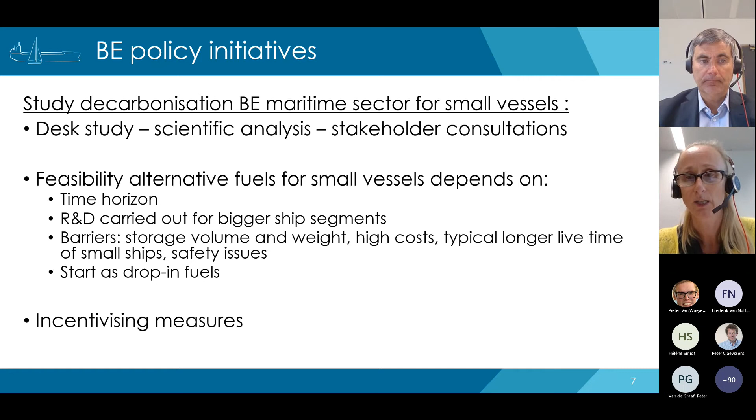On the other hand, these small ships usually have a lifetime typically longer than the bigger ships, and therefore the introduction of new technologies in the shipbuilding process should in fact start even sooner than for the bigger ships. Finally, the study also looked into implementation measures to incentivize the uptake of new technologies. We looked at possible legal frameworks, but also at the impact that regional and international measures would have on these small vessels, and this impact is quite significant.

Therefore, it's very important that the IMO comes with a very clear message on what is the pathway to the full decarbonization of shipping. So this brings me back to the international level, and at COP26, which recently concluded in Glasgow, Belgium signed the Clydebank Declaration on Maritime Green Corridors.

Together with our partners and industry, we will look further into possible routes to one or more of our ports where zero-emission ships could be introduced. We believe the introduction of zero-emission ships in the short term is very important to start the full decarbonization of the whole shipping sector. It is also important to stay on the pathway to the Paris Agreement temperature goals.

And for the same reason, we believe that zero-emission shipping should be reached by 2050. To be able to do this, we will need many partners to realize this. We are very happy to see that the call for action from the Global Maritime Forum has been signed by more than 160 companies, and those companies are not only shipping companies, but also ports, energy suppliers, and many more.

So Belgium is very committed now to advocate for a more ambitious greenhouse gas strategy at the IMO for mid and long-term measures that make the transition to zero-emission shipping happen. As said, the 2050 goal for zero-emission shipping is important for us, and we also believe that setting goals for 2030 and 2040 will give us more certainty to achieve that goal.

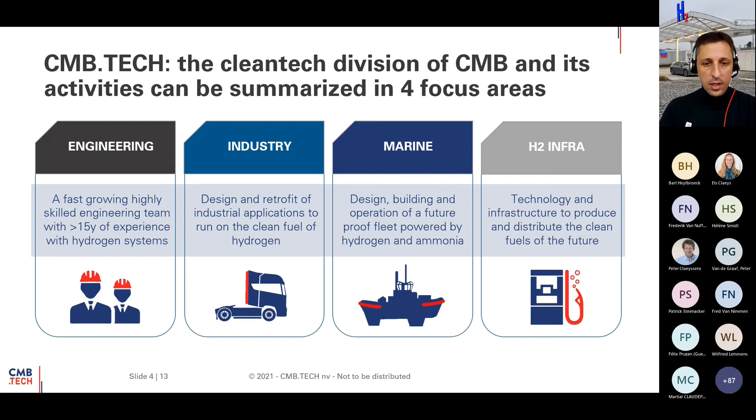If you look towards our technology, we use a combustion engine, quite well known, and we believe that heavy-duty diesel engines have a long lifetime. These are expensive assets and they create a lot of emissions. So we think every kilogram we can save on emissions is one saved, and we should allow this combustion technology to work on clean fuels.

So how does it work? We just aspirate the hydrogen molecule, we compress it, as it's the tiniest molecule. It distributes quite uniquely, uniformly. We inject a tiny amount of diesel to kickstart the combustion process, and we have the temperature and heat which produces the power. If there is no hydrogen available, we can only inject the full diesel amount. And then, looking at the engines, you can easily swap to an ammonia engine, because instead of aspirating hydrogen, you can also aspirate ammonia.

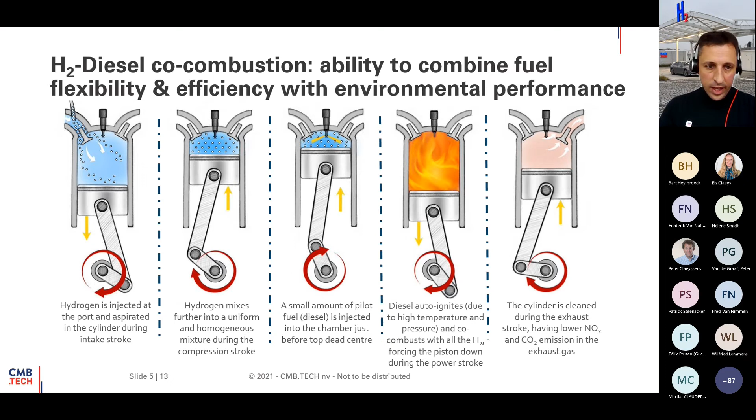If you look towards our applications, we have our cooperation with ABC, which will be handled later on, but we also have some high-speed engines which we use for greening up our applications. If you look towards our scaling-up story, we started with this 4 years ago with our Hydroville.

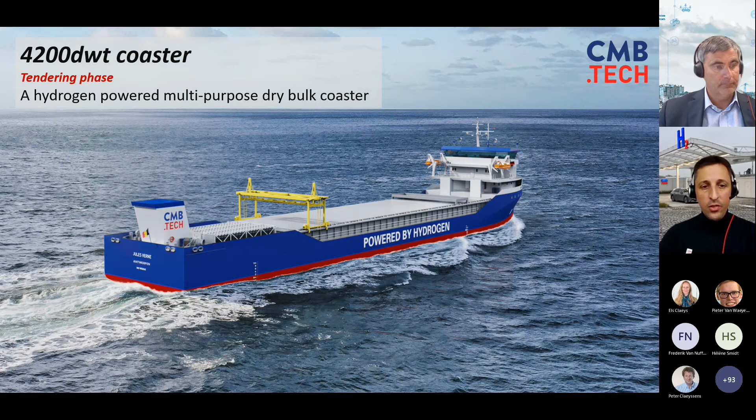But again, looking towards scaling up, we are building a tugboat for the port of Antwerp. It has 2 medium-speed engines of 2 megawatts. And of course we're scaling up further, because the first prototypes will be for operation into ports. The next step will be in between these hotspots, like Port of Rotterdam and Port of Antwerp. I think the first vessels with coasters will be operating on a dual fuel system.

So I hope I have given you a quick fly through of what kind of projects we are working on, but please stay tuned. There's a lot of new projects to be developed quite soon.

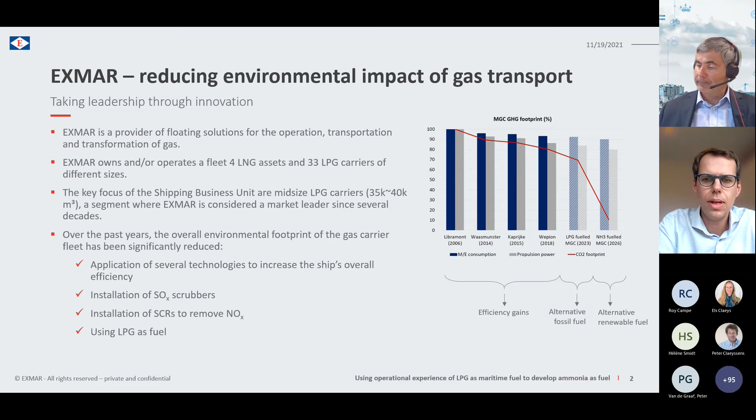A very practical example of our first development as a fossil alternative fuel is our very large gas carriers Flanders Pioneer and Flanders Innovation, which are delivered this year. These are 88,000 cubic meter very large gas carriers transporting LPG over the world. These are the first in the world to be LPG fueled.

And to show you that it's not going as fast as we would like, this is a project which we started back in 2012. In 2012, we had our first ideas and we did an approval in principle on LPG as fuel.

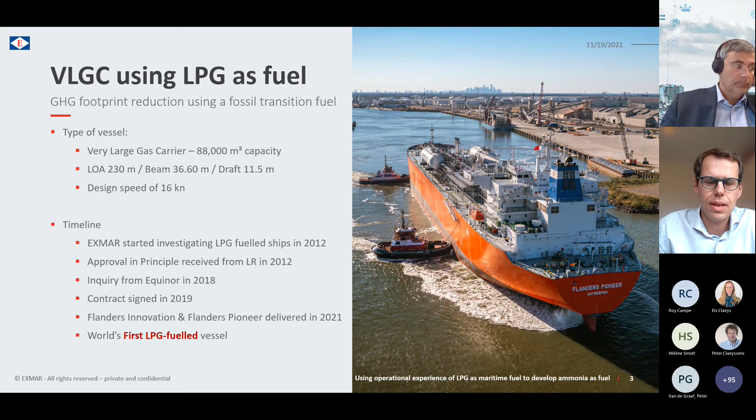And it took up to 2018, where our clients, in this case being Equinor, saw an opportunity and saw the merit of having this alternative maritime fuel. We signed a contract in 2019, leading to the delivery of the ships this year.

What we have achieved with those ships, and confirmed by the sea trial and by the actual sailing, is that we have been able to save 38.5% emissions of greenhouse gases, which is very important. We have an EEDI attained of 4.76, so compared to the IMO baseline EEDI, we have done a lot and we are best in class, and we're doing better than what is expected.

This was our first primary goal. So of course, not only about CO2 and greenhouse gas, we don't have any SOx because LPG is sulfurless. We have lower NOx, and of course we are compliant with Tier 3 using an SCR. Using LPG also ensures that you have 90% less particle emissions. This is not yet regulated, but it's also an important factor. So there is no soot, no PM being emitted, or very much less.

We also have zero hydrocarbon slip because we operate our engines in diesel cycle, so all LPG, all hydrocarbons are properly burned. And what is also increasing the efficiency and lowering emissions is that we don't have bunker stops anymore. These ships can keep on sailing using their cargo directly as fuel.

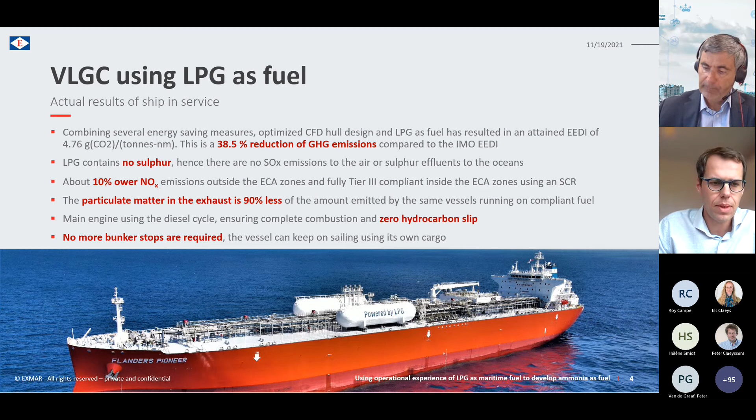But that is, of course, only a first step. The next step, what we do and what we are now heavily working on, is to work on ammonia as fuel. And there we have selected our mid-size gas carrier as the first ship to be applied with ammonia as fuel. This will be a 41,000 cubic meter LPG carrier, ammonia carrier, of which we have 38,000 cubic meter as cargo and 3,000 cubic meter we will save as fuel for ammonia.

As you can see, there's quite a lot of volume needed because indeed ammonia has a much lower calorific value compared with diesel or LPG. So that's a challenge, but which we can overcome using deck tanks and reserving space in our cargo tanks.

What is very important is that we use an ammonia tanker or an LPG tanker as a base case, which is already in compliance with the IMO IGC code. So this project is a perfect pioneering project for ammonia as fuel, because we can see the ammonia fuel system simply as an add-on to the existing cargo handling system and the existing ammonia cargo system.

All we need, and we are already in discussions with our Belgian flag, is an exemption from the administration, because indeed the cargo is toxic, and under the current IGC code we cannot use toxic cargo as fuel. But of course, using risk-based design principles, we will do our utmost to convince everybody that this is a safe way to proceed.

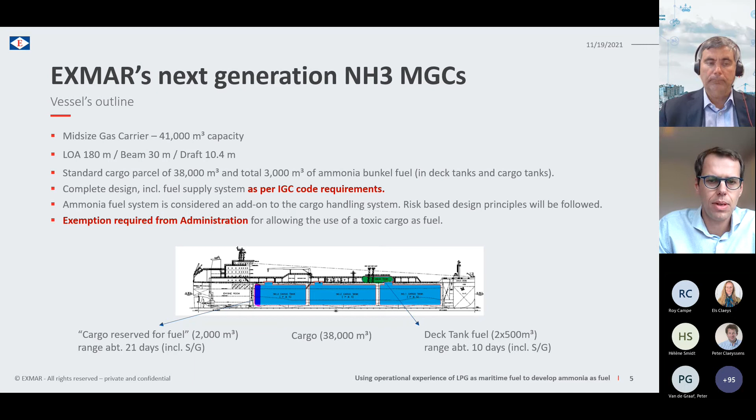In terms of timeline, we try to make this faster, much faster than the implementation for LPG as fuel. We started last year. This year, 2021, we have received an approval in principle from Lloyd's Register for the entire fuel gas supply system on the ship and the ship design. Our basic design is, by the way, completed.

Now we are actually a bit in holding mode, and we are waiting for the development of the engine. So engine makers are very hard working on having their engines available. We believe we can place the engine order in 2023 to have our ship sailing and construction completed on ammonia as fuel by mid-2025.

We have a target to reduce our emissions or greenhouse gas footprint by 80 to 90%. We cannot go to zero yet. That is for the timeline 2030, but today, by 2025, we try to achieve that. It will depend on what the engine maker can achieve in terms of pilot fuel mixing with the ammonia. There will be no SOx emissions, there will be almost no particle matters. We'll be fully compliant with IMO Tier 3, again using SCR.

There is a lot to do about ammonia slip and nitrous oxides, which are also harmful for the environment, so we will do our utmost to reduce this to an absolute minimum, not jeopardizing the savings which we contemplate on CO2. And so there too we will install either the necessary catalyzers or even work with the combustion to make sure there is simply no creation of those emissions.

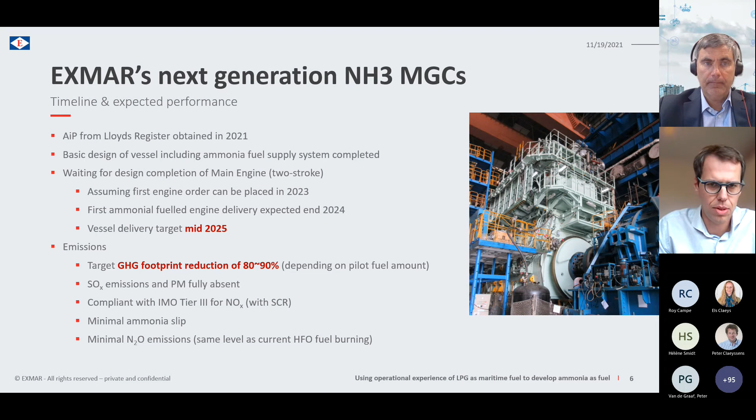And lastly, what is very important is the well-to-wake principle. I mean, it can be that if we all shift to ammonia as fuel, we rather increase emissions compared to decreasing them, which is a very big threat on this development.

That's why we at EXMAR look at the entire supply chain and work with our customers, in this case Nutrien, a major ammonia producer, to not burn gray ammonia made by methane cracking. Instead, we will use blue ammonia to start, where CO2 emissions from methane cracking are captured and stored forever, and it will be a step towards green ammonia, available later this decade using sun and wind power via electrolysis.

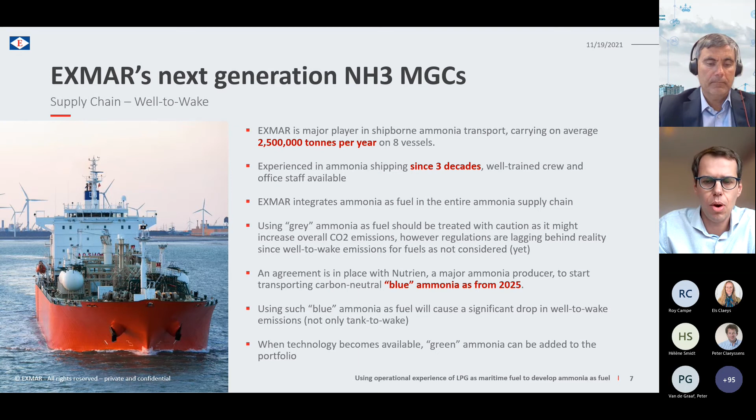And we can do that. We are part of that supply chain. We are already shipping 2.5 million tons of ammonia per year, and we've been doing this for three decades. That position in the supply chain, combined with our experienced crew and office staff, we believe makes this a perfect test case on how we can lead the industry towards a leaner, lower emission footprint and work towards a 2050 goal of zero carbon emissions.

Thank you very much for listening to me. Thank you for having this opportunity to present here. Back to you, Bart.

Thank you, Frederick, for highlighting the transition from fossil fuels to non-carbon fuels such as ammonia, which is definitely one of the important alternative fuels we are looking to for the foreseeable future. Now, from another perspective, manufacturers also play an important role in the switch to alternative fuels, providing technological solutions to the transport sector.

For our next speaker is Tim Berckmoes. He's CEO of Anglo-Belgian Corporation in Ghent, Belgium. Under his leadership, ABC has grown to a world-leading engine manufacturer with a focus on sustainability. ABC invests largely in research and development of engines suitable for a range of alternative fuels in the maritime industry, but also diversified in other sectors, particularly transport and energy. Tim, without any delay, the floor is yours, and looking forward.

Thank you very much, Bart, for this nice introduction, and thank you to the audience for attending this webinar. I will shortly introduce you to ABC. We are a medium-speed engine builder located in Belgium. We have 2 foundries in France, 2 in Germany, and 1 turbocharger manufacturer in Germany. We have a future as a combustion engine builder - we are more than 100 years old, and we believe in future fuels together with combustion engines, same as Roy explained in his presentation. So we can give full power with zero emissions, and we will explain how.

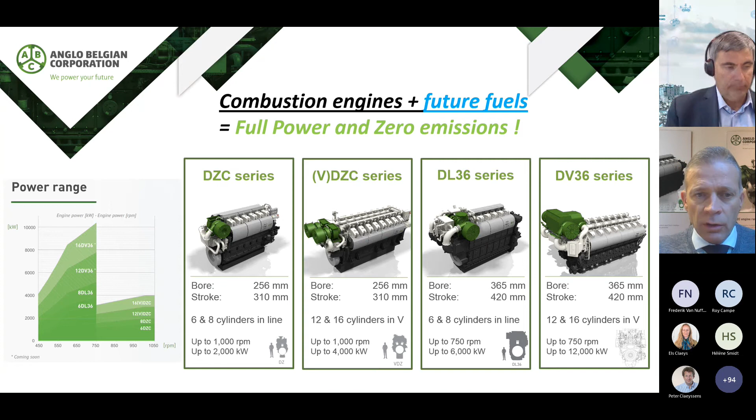Our engine range is from about 800 kilowatts up to 10 to 12 megawatt engines, at 600 RPM, over 750, 900 up to 1000 RPM. We have world-class customers - inland vessels, a lot of fishing clients, tugboat applications, ferries with CNG, hybrid, solar panels, polar cruisers, windmill installation vessels, navy vessels, coasters, and a lot of windmill installation with heavy lifting equipment. Also other sectors such as locomotive business, power generation together with solar panel and hybrid generation, and we also have nuclear emergency gensets, for example for EDF.

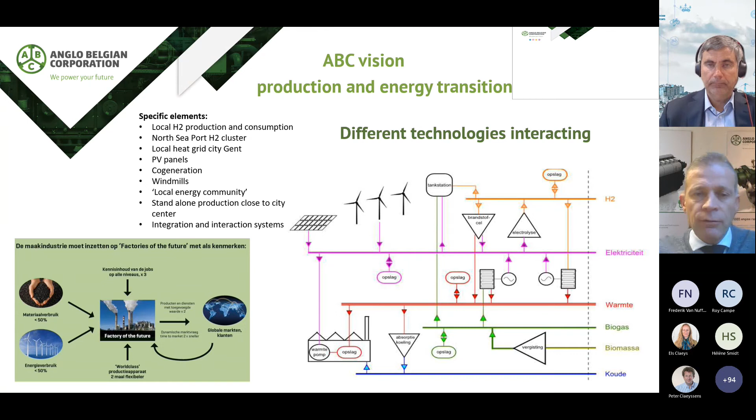We believe in production in Europe, but also production within the energy transition. We have our own production facilities here in Ghent, solar panels, and our own engine production energy. We are connected to a heat system to share heat with the community around ABC. And we are also expanding the factory with another 5 hectares in a new transition project where we want to show close to the city how to have off-grid production and energy production.

Which are now the developments where ABC is focusing on? Well, first of all, we still have the good old diesel engines, which can burn diesel but also heavy fuel and marine diesel oil, with a very performant after-treatment system. This means SCR technology, so DENOX with urea injection, but also particle filters. We have introduced and developed within our group particle filters to also filter out ultra-fine particles, so you can get the ultra-low emission vessel notation from classification with these after-treatment systems.

On the new fuels, we also have a focus on methanol. We joined together with the FastWater project, which is a European subvention. We now have an engine range from 1 megawatt up to 2.5 megawatt as dual fuel engine on methanol. Methanol is becoming one of the future fuels in the dredging sector, in many ferry sectors, and so on.

So we also focus on methanol as a future fuel. Then, as Roy already explained in his nice presentation, we have a joint venture with CMB, which is BeHydro. We produce hydrogen engines as dual fuel, but also as 100% spark ignited fuel, in the same power range from 1 megawatt up to 2.5 megawatt. And this I want to emphasize.

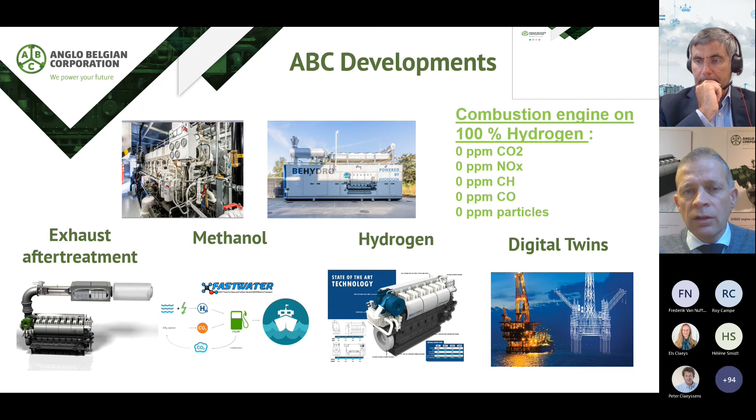Next to that, we also develop digital twins to advise our clients in this quite complex environment about new regulations, emission rules, and fuels with different heat capacities and combustion speeds. Our ambition is to help our clients make the right choices for emission after-treatment and fuels, depending on their specific application.

But we also face some issues, and I want to use this opportunity to explain our point of view on the challenges we might have together and where we can work together. On emission regulation, the certification process is quite complex, quite long, and quite expensive for small and pilot projects. So altogether, as Frederik also mentioned, we need an open view to permit innovation to go more quickly, so that certification doesn't break the process of innovation.

Also, it's a big challenge that the IMO has different rules than EPA, EU regulations, or inland water navigation CCR. As a manufacturer, it is quite complex to satisfy all these different regulations with all their different process parameters, different criteria, and sometimes different test equipment. And then there's time stability - we don't need new regulations coming into force the day after the first one took effect. We really need stability on the emission side.

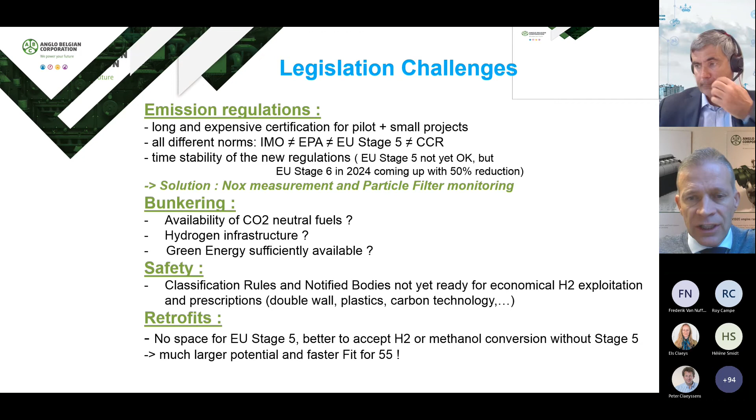And then a suggestion from our side: retrofits - please accept allowing clients to retrofit their existing engines and not force them to go to EU Stage 5, which is very expensive and quite difficult to integrate at volume. Let clients retrofit to methanol or hydrogen without having to install all the after-treatment systems. It will help speed up CO2 reduction.

Just some applications which we do together with Roy and his team: we are also converting locomotives from diesel to hydrogen. We have the nice Hydrotug project in the port of Antwerp, but we also have ambitions for more rail projects, power generation, push boats, and cold ironing.

My last point: we used the opportunity at Europort in Rotterdam to present our complete new Evolve range. Just for your information, this engine is able to burn all liquid fuels and all gas fuels - it can burn LNG, CNG, hydrogen, methanol, and also diesel, biodiesel, and other liquid fuels such as heavy fuel. So from our side, as engine builder and manufacturer, we are ready today for a hydrogen economy, and we would like everybody to join this process.

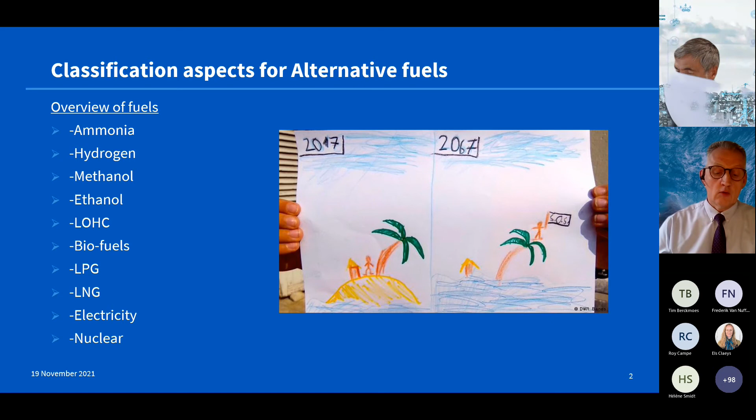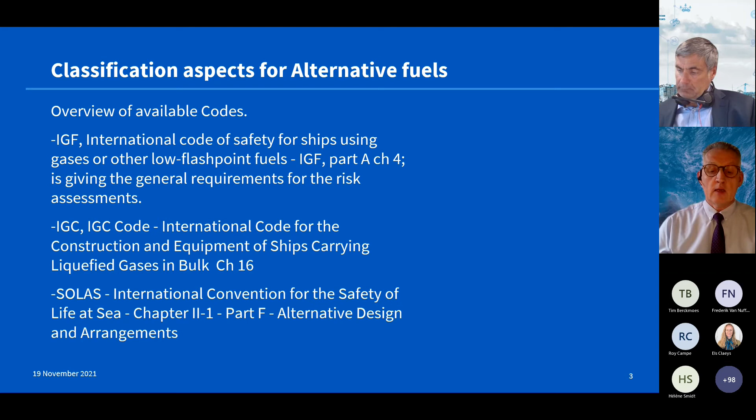The question is, how do we do this in the absence of prescriptive ruling? We have the IGF code, we have the IGC code, we have SOLAS. All these codes make reference and give guidance on how to deal with alternatives, including alternative fuels, on a risk-based method. Classification societies have ruling in place for some of the alternative fuels, and in their existing ruling there is availability to accept risk-based design, as also indicated in the mentioned IMO codes.

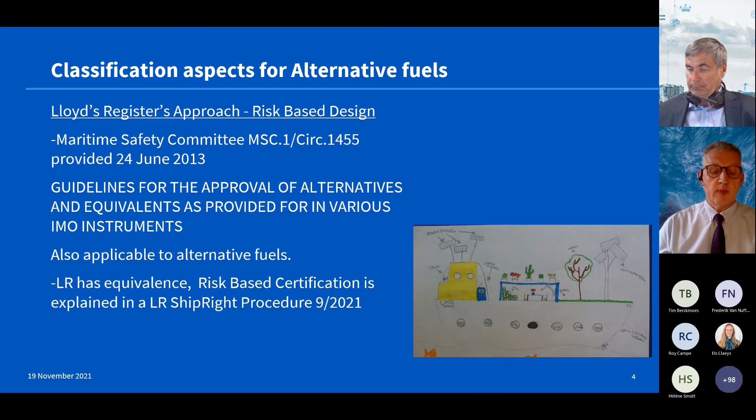As mentioned before, the risk-based approach is required to ensure that the level of safety for the new fuels is equivalent to the level of safety associated with oil fuels. One mechanism of demonstrating equivalence with SOLAS alternative designs and arrangements is using risk-based techniques, as also indicated in the IGF code. Risk-based design guidance is also provided in MSC Circular 1455. This document has been translated by LR into a ShipRight procedure called risk-based certification, earlier named risk-based design.

During the risk assessment, the design will be questioned on the effect of events, for example fuel tank position versus different impacts like collision, dropped objects, fire, explosion, and leakage. If the risk is found unacceptable, additional measures or design changes are needed.

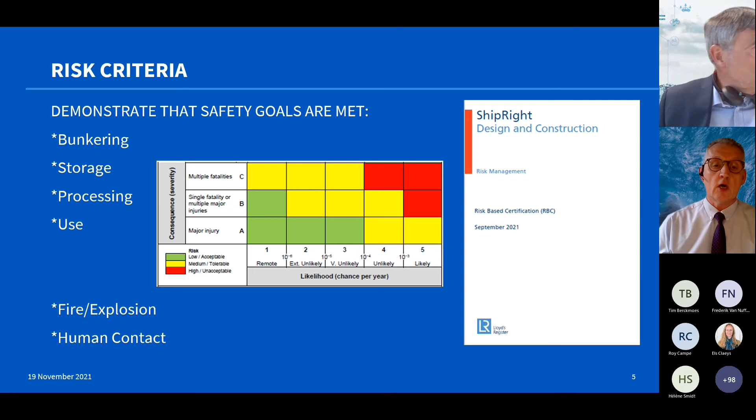Quick overview of the risk-based certification scheme. A design and safety statement is prepared by owners, designers, shipyards, makers. It's followed by a risk assessment on documentation made available. During the risk assessment, some risks may be identified, and then supporting studies are required to look for mitigation of the risk by additional features or by changing the design.

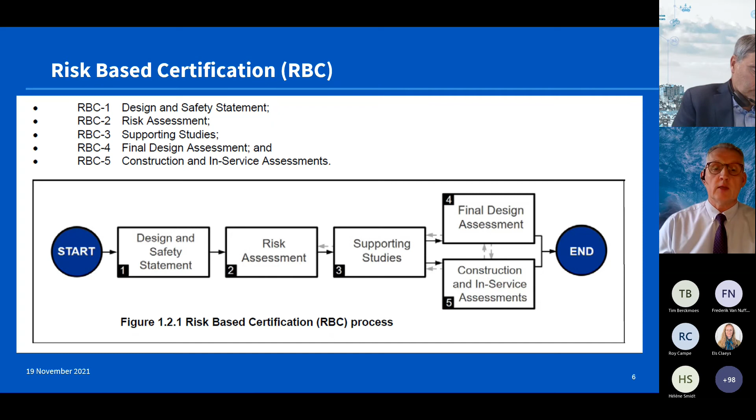In the fourth step, the final design will be reviewed again to see if the mitigating measures and design changes are sufficient to call it a safe design. Additionally, we have added a fifth point - even at this stage, we will be looking at the initial testing required for the new alternative fuel to be implemented on the vessel. Likewise, we will look at the future requirements for service to be carried out on these vessels when they are in service.

I have listed some Belgium-related projects with alternative fuels for your information. All these projects have been dealt with as a risk-based design. We have also provided vessels which are methanol fueled. There are approvals in principle for several types of vessels around the world, and also we have an ongoing project in the inland waterway industry, which is also quite important for our region. Also, yachts are finding their way to alternative designs and fuels.

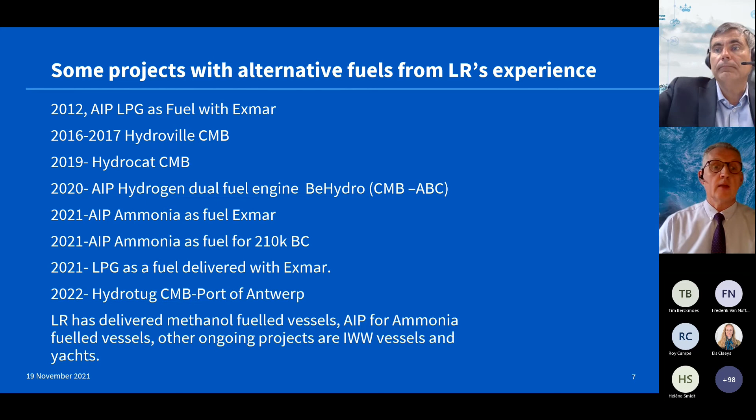So to conclude: yes, there are many options for decarbonization through alternative fuels. The use of alternative fuels is regulated. Except for LNG, there are no full prescriptive rules available, as all the prescriptive rules refer to risk-based design. Research and validation of technologies is ongoing and needs to be safe. And finally, collaboration at all levels is required.

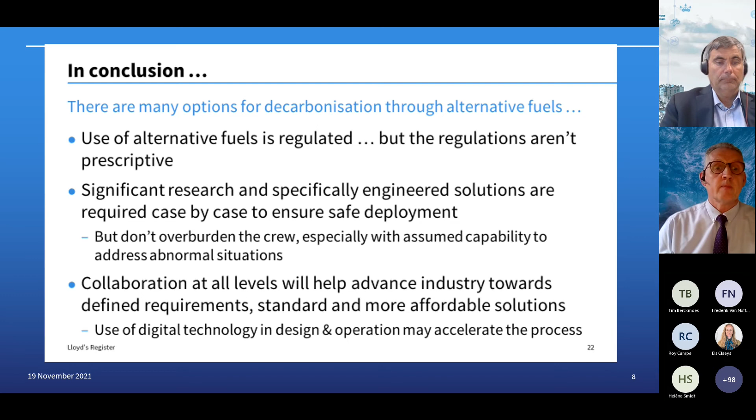Together, we can unlock the potential of alternative fuels in maritime. I would thank you for listening, and thank you, Bart, for having me this afternoon. Thank you.

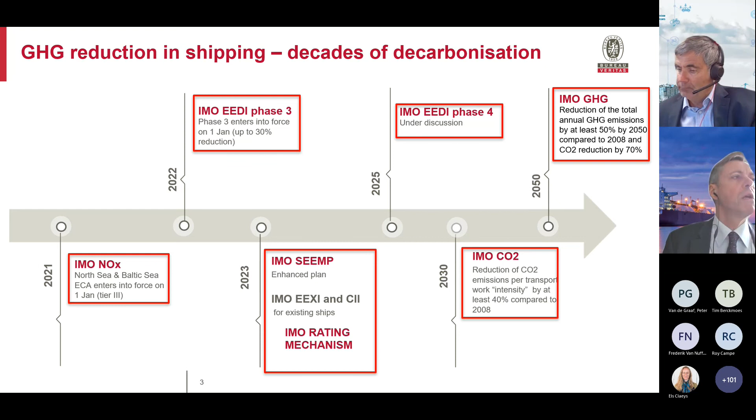We have a high pressure from the regulation, so we, of course, are part of it. Our role ultimately is to allow the development of new class rules as well as supporting the development of regulation. This is how we see our participation in this race for decarbonization.

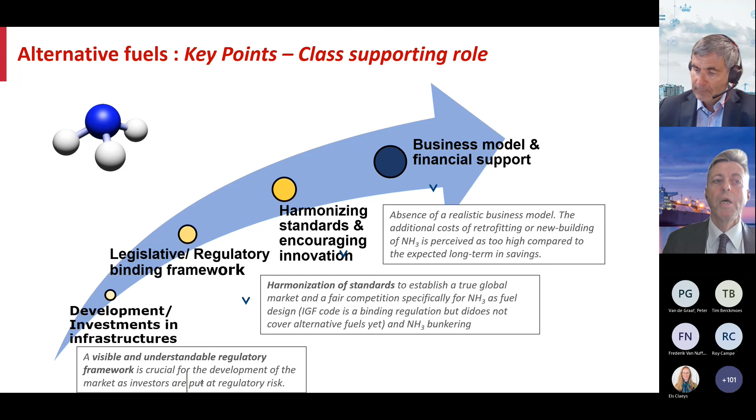So here you can see that we have different stages where we intervene. We create our own rules when there is an identified gap or missing rules. And certainly we don't necessarily pick a specific solution, but we help stakeholders make the best commercial and operational decision based on the technical insights that we can provide.

To that point, we are also participating in the major moves taking place today. We are part of the Hydrogen Council in order to be at the heart of this change in terms of fuel and energy.

I would like now to also focus on the existing situation. As already described, we have to deal with existing regulation, and we have to accompany the IMO effort to adapt, modify, complete, and change this existing regulation in order to accept and welcome on board all the new candidates as alternative fuel. For the time being, all the projects that we have are dealt with through risk analysis and alternative design.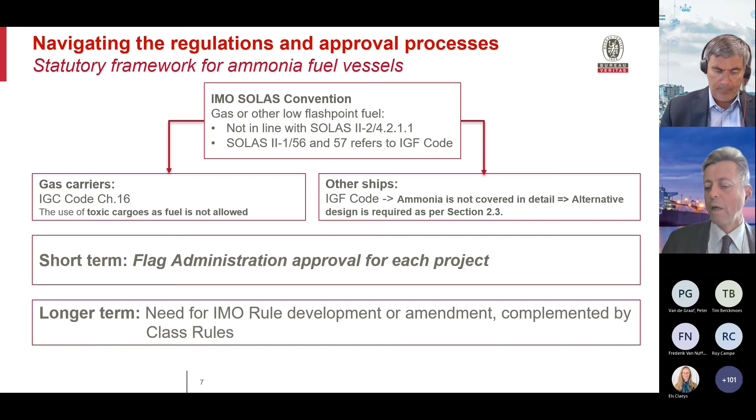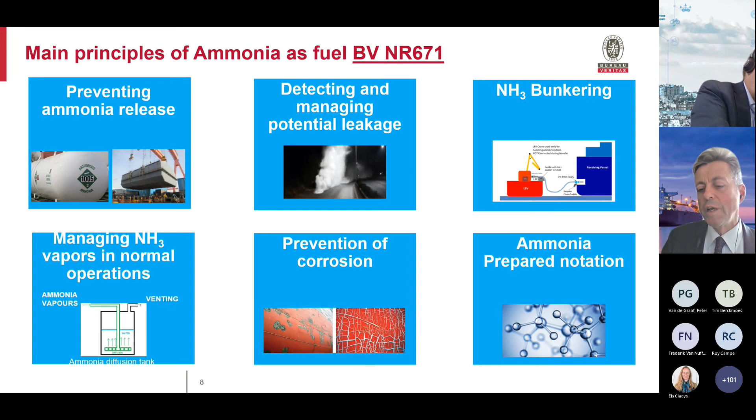But let's focus on a very specific and rational approach. We have delivered specific rules for ammonia fuel, so this is an example. We also have rules addressing hydrogen and methanol as fuel, but ammonia maybe is the one on stage today. We have delivered this rule simply because there is a need from the industry. We have seen very exciting projects, so we need to accompany those projects.

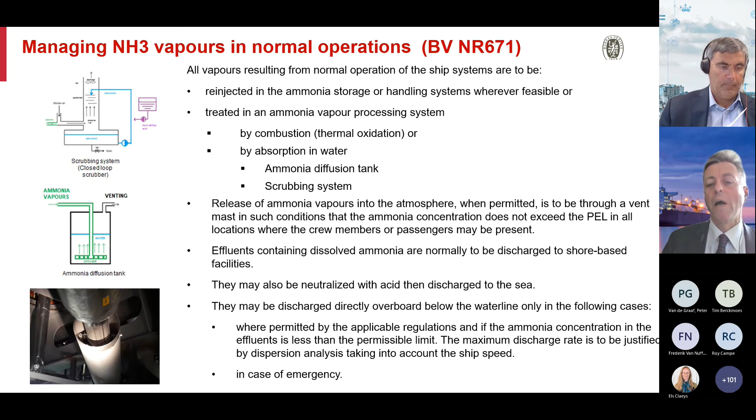And when we have to deliver, for example, a risk analysis, we need a regulatory background. That's why we have developed, with the help of the industry, these absolutely new rules for ammonia fuel with new devices. This is all about technology today. We are going to reach the IMO target only if we are able to deliver new technology, and if we are able to accompany this new technology with dedicated, specific rules.

So here is an example of work done with a large consortium of the industry, with some key players from Belgium here. In Belgium, shipping industry players are present in this consortium with MAN two-stroke ammonia new engine, and we have delivered this ASOP risk analysis back in September this year.

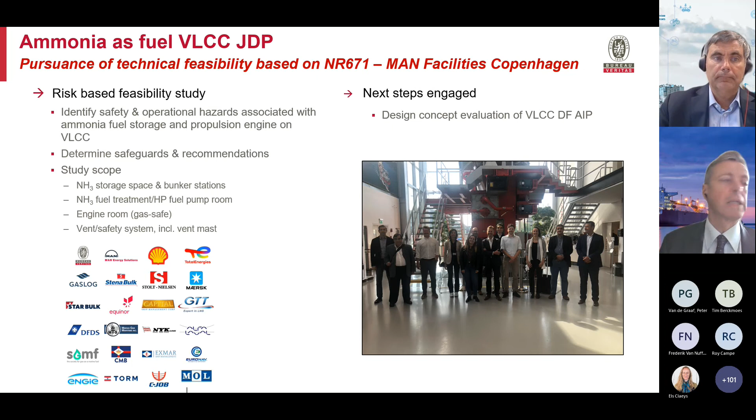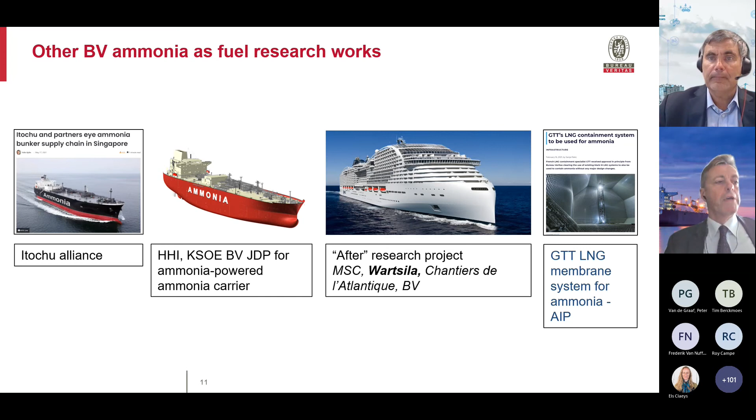Few other projects that we are ending now: an ammonia carrier with ammonia fuel with a large shipyard in Korea. Interestingly, a possibility to transform and change over the fuel of an existing vessel running on LNG to running on ammonia later on. And we have also delivered approval in principle for equipment manufacturers such as GTT membrane tank.

But I would like to focus on this point of bunkering. It has been touched upon just as a weakening point. We, as a class, have to be part of it, to make sure that the weaker link—bunkering of ammonia in that case, but can also be hydrogen—is managed and mastered. In terms of safety, we have to make sure that safety is attained, but we have a completely different risk profile compared to LNG.

LNG and ammonia are completely different risks, so we have to make a kind of global approach with the main stakeholders, and that's why we are very active in SGMF work now, and within the Itochu work also. We are seriously taking into account and working on solutions for ammonia bunkering in SIMOPs, simultaneous operations, and in the right center of commercial port.

So I would like to conclude my presentation by saying that all the presentations are focused on fuel. That's true, but we believe in BV, in Bureau Veritas, that the future of sustainable shipping is about much more than fuel. I would like also to mention wind propulsion systems, for example, which is a very low hanging fruit that can be caught easily, and we are also working on that part of the solution. So with that, I would like to conclude and thank you very much for your attention.

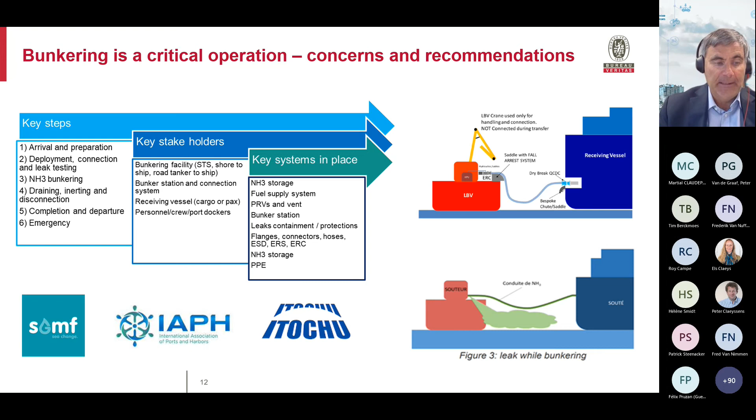Okay, to round up the previous presentations from different stakeholders in the use of alternative fuels, it's also important to hear the expectations from the shipping industry, from the ship owners, towards governments and industry in view to further facilitate the use of alternative fuels. Our next speaker, Mrs. Hélène Smolt, represents the Royal Belgian Shipowners Association, where she follows up on topics related to maritime innovation and sustainable finance. Within the Belgian Shipowners Association, she leads the Maritime Industry Decarbonization Council, a think tank that brings together stakeholders from the entire maritime value chain to share technological knowledge from ongoing projects. Hélène, please take the floor.

You may proceed. Okay, thank you for the introduction. It's a real honor to be here today with you all.

When discussing the fuels of the future for maritime, it's important to make a distinction between new builds and the existing fleet. Our industry's ambition is to have the first zero-emission large maritime vessels market-ready by 2030. So our first concern is, will these alternative fuels be available? Since we cannot be sure that the answer is yes, our vessels will need to be equipped with dual or even tri/multi-fuel engines, as Tim from ABS just mentioned, so they are flexible when availability falls short.

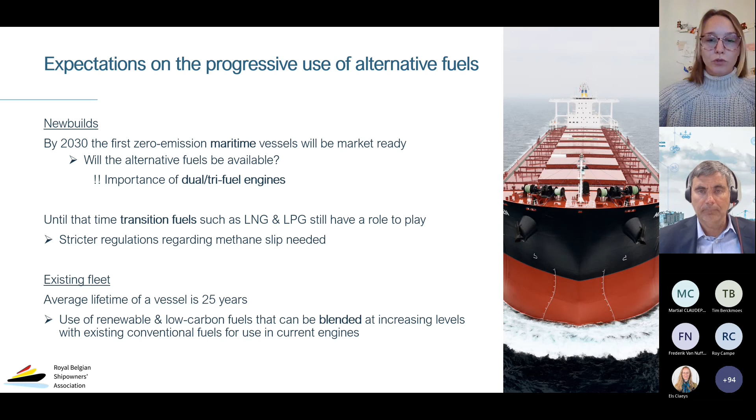When it comes to the existing fleet, it is important to take into account the average lifetime of a vessel, combined with the fact that an engine cannot simply be replaced as easily as the old refrigerator in our kitchens. That is why, for these vessels, alternative and low-carbon fuels can play a role by being blended with conventional fuels up to a certain amount, so they can still be used in the existing engines.

To make this fuel switch work, there are 5 critical pillars. Number 1, fuel availability. Without a steady supply of green fuels, we can never reach our zero-emission ambition.

Second, fuel quality. Especially when it comes to blending of fuels, we need better and more detailed ISO standards. We saw so many of our engines breaking down when the low sulfur fuel regulations came into place, and as we hear from our members, especially now that the temperatures are starting to drop again, this issue is still present.

Third, life cycle assessment of fuels, meaning tank to wake and well to tank. It is quite obvious that an alternative fuel should be produced in the cleanest way possible, and that the ship owner can be sure that whether the fuel is produced in Europe or, for example, Brazil, the same norms will be applied.

Safety. Also a very important one, taking into account the toxicity and flammability of some of the new fuels.

And then last but not least, the price tag that comes along with these new fuels. Will conventional fuels become more expensive by, for example, imposing a carbon tax, or will the new fuels be subsidized in a way, like the carbon contracts for difference that Europe is currently looking at under its innovation fund?

One thing is sure, these pillars can only stand strong if they are supported by international regulation and, of course, in close collaboration with the industry. We have the knowledge, we want to share the knowledge, and we want to move forward. Thank you.

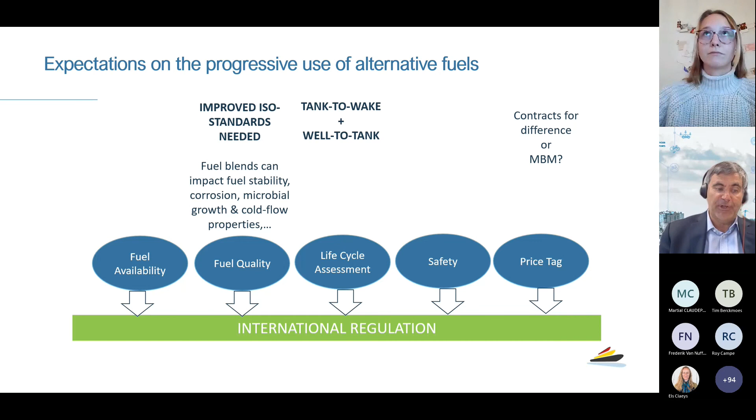Thank you, Hélène, for sharing your vision on the expectations for the ship owners. I think it's very clear what is necessary for the shipping industry to move ahead, and what is expected to proceed with these alternative fuels and to reach the environmental goals which have been set.

Thank you all to the speakers for sharing all this information and giving such nice and very interesting presentations, which, of course, it's a very extensive and comprehensive subject, the alternative fuels, and much more has to be said about the deployment and use of these alternative fuels.

But let's move to a second phase of this webinar, being a bit more interactive. So despite all the valuable information that has been provided from the distinguished speakers, it's always good to have an opportunity to pose some open questions, to share views, insights, visions toward the future on their experience so far with the use of alternative fuels. And this may give us a glimpse on what the way forward would be and the challenges which are to be overcome.